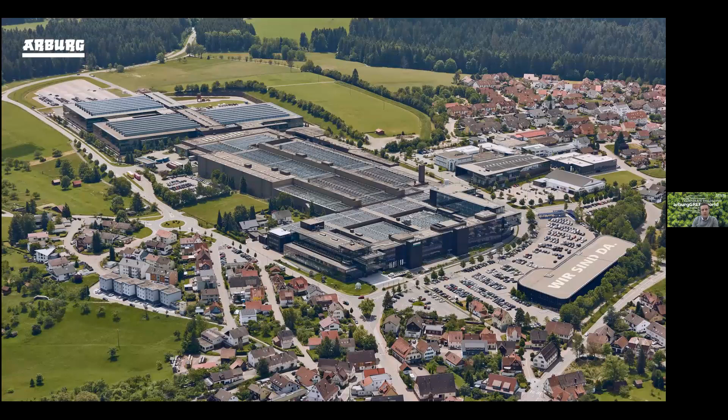First of all, a quick and brief introduction and overview of the company Arburg. Arburg is located in the south of Germany in the beautiful Black Forest area, as you can see on the picture. This is our headquarters and main facility. All our machines are produced 100% in these facilities. So yeah, 100% made in Germany and 100% made in the Black Forest.

We are a producer of injection molding machines, so-called the all-rounder, in a range from clamping forces from 125 kilonewtons up to 6,500 kilonewtons or 650 tons. We have different driving concepts, beginning with the all-drive, which is 100% electrically driven. Then we have a hybrid concept, which means that we inject due to an accumulator to achieve a high injection speed. And then we have, of course, the full hydraulic injection molding machines.

Just to give you a brief overview of what we are doing. Some facts and figures: as you have seen on the previous slide, our headquarters in Germany is approximately 210,000 square meters big. We have further construction, so we are growing year by year. The turnover in 2020, due to the Corona effect, of course, was a bit less than the years before.

But we are on good track to achieve the same result as in previous years. So quite happy with the order income in the last year. Export share about 70%, and worldwide we have approximately 3,400 employees.

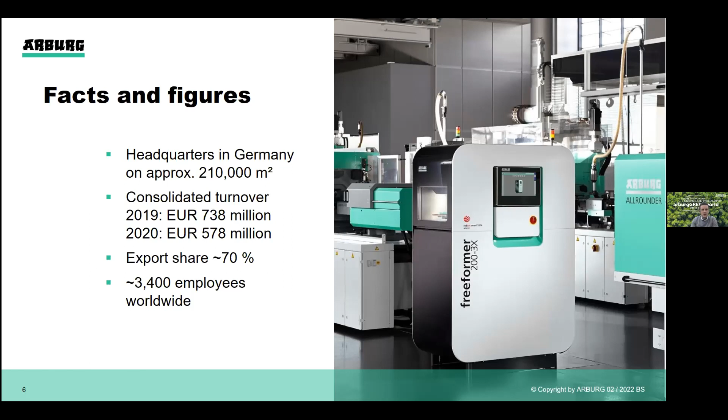Coming to my main topic, sustainability: keywords such as alternative material processing and use of recycling material, the responsible use of raw material, and as well energy efficiency and legislation, are increasingly becoming the focus of processes in industrial companies. Based on this, it is also part of our philosophy and our daily business.

So talking about added value, resources, regulation, and circular economy. To have answers to all these requirements and questions, our solution for these big challenges—and not just big challenges, it's also a great opportunity—is the so-called Arburg Green World.

With the Arburg Green World, we're bringing together all of our activities for greater production and resource efficiency, as well as a more circular economy and a sustainable reduction in the carbon footprint of plastic processing. One major topic, of course, is the circular economy. Circular economy means targeted use and efficient recycling of plastic.

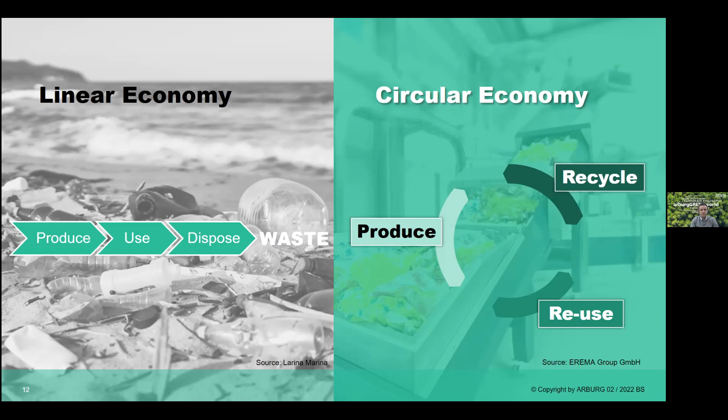And a functioning circular economy, again, is only possible when everybody is working quite close together. But therefore, from our point of view, the focus of circular economy is on the recycling and the processing of recycling material. And what does recycling mean?

Does it mean recycling, or how are these materials available and how does this material behave? And therefore, I would like to start with the definition. You see on the left-hand side, the PIR, the post-industrial recyclate, and these are collected directly in production as a startup material or as an off-spec product. This material stream can either be fed back into the process in part, or it is processed again as granulates by service providers.

And then on the right-hand side, or otherwise, we speak of the PCR, the post-consumer recyclate, and all plastics that occur at the end user. In Germany, mostly collected in the yellow bag, it's called the yellow bag, but mostly thermally recycled and not returned to the material cycle in production process.

And this is where we need to have our focus, on the PCR material. And for a circular economy, these two resource streams must be post-treated. And what does it mean exactly? Let me further introduce you to some more definitions.

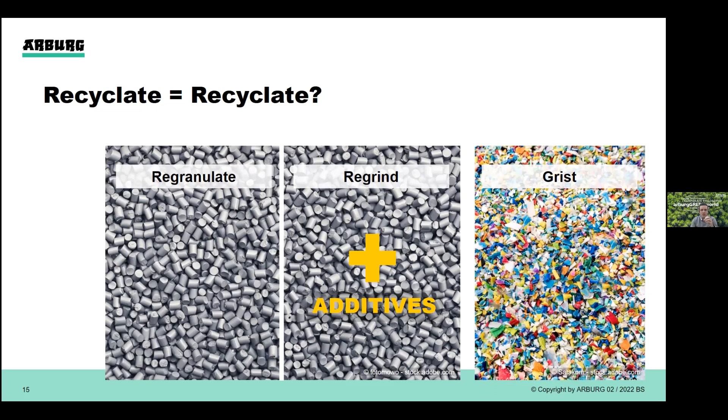And on the right side, we have the grist, with different sizes and shapes. It can also be contaminated with some dust, but this grist is not compounded and not regrinded.

And then in addition, there's also a different definition of terms of the recycling grade in terms of the type. On the left-hand side, we have type pure, which means only one polypropylene, for example, from a raw material manufacturer. And then we have the variety pure, this means only polypropylene, possibly from different raw material manufacturers. Then we have the variety-like, this means polypropylene only, but different.

It means only polypropylene, but from different sources or with different properties, for example additives, talc, and whatever. And then we have on the right-hand side the most difficult to process, the mixed different plastic. In this case, it means that PP and PE are mixed together and have been recycled, which is definitely the greatest challenge to process furthermore.

This is just a beginning and an overview of what recycling is about, and why it is so difficult to process recycling due to the different types, due to the different shapes, and so on. So recycling means, at the end of the day, it is not just the recycling itself. We have, as mentioned, different shapes, we have different sizes, but also the composition can vary, and this turns into effects on the processing.

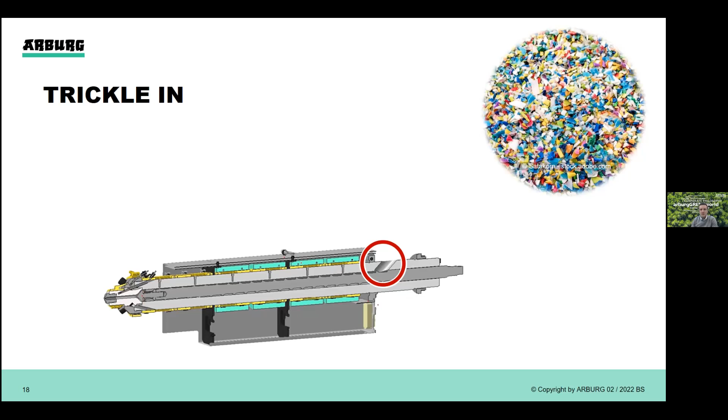But this is not the most flexible solution for preparing regrind, so we have improved the filling geometry, as you can see in the green picture. An additional vertical hole in the intake area, at a 90-degree angle, is intended to improve the trickle-in behavior and the subsequent sliding of the regrind, ensuring that especially the grist material is fed properly into the injection unit.

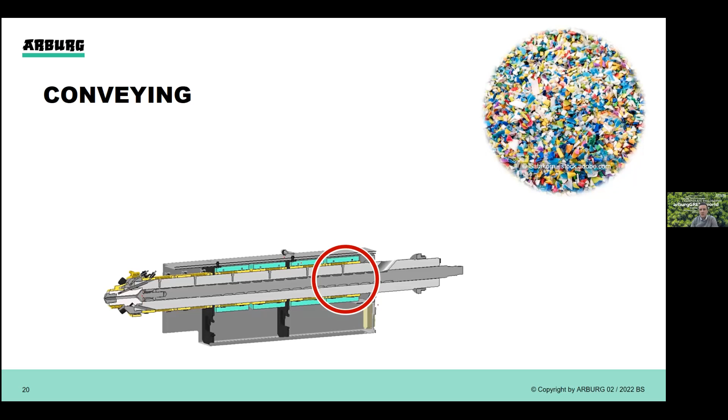But conveying is also important and needs focus. One step further towards solids handling: the regrind differs in grain shape and size, so the transport of these solids can be reduced. The conveying of solids can be improved by increasing friction between the cylinder and the solid itself, achieved by making grooves into the barrel, shown as the dark green line. This prevents the material from circulating with the screw rotation and helps ensure the material doesn't slip through.

Not only modification to the cylinder geometry can improve feeding behavior, but the screw geometry itself also plays an important role. A screw with increased compression is suitable for processing regrind or recycling material, so we recommend a so-called high compression screw. Based on our experience, this ensures improved melting but also improved feeding behavior, thanks to its deeper cut feed zone in the screw itself. This really comes down to the different shapes and design of the screw.

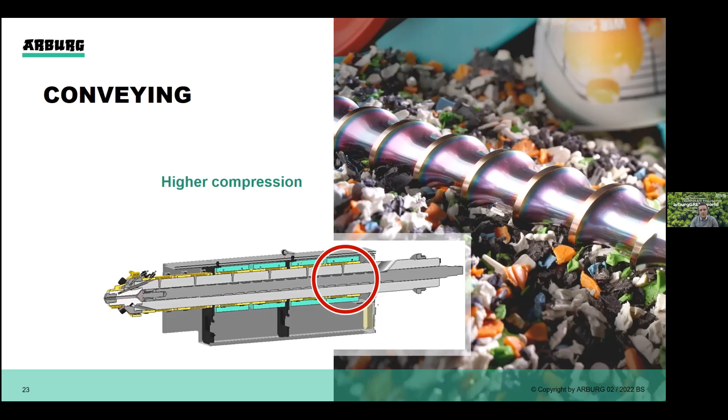Another aspect concerning processing of regrind that has not been dedusted: dust content, especially when processing grists, can lead to deposits on the screw. In addition, the recycling material can contain impurities that are harmful to the screw and barrel. Our answer to these deposits is the correct use of coating technology, and we recommend a chromium nitride coating, CrN coating, as shown in the picture, to reduce deposit formation and also provide increased wear protection.

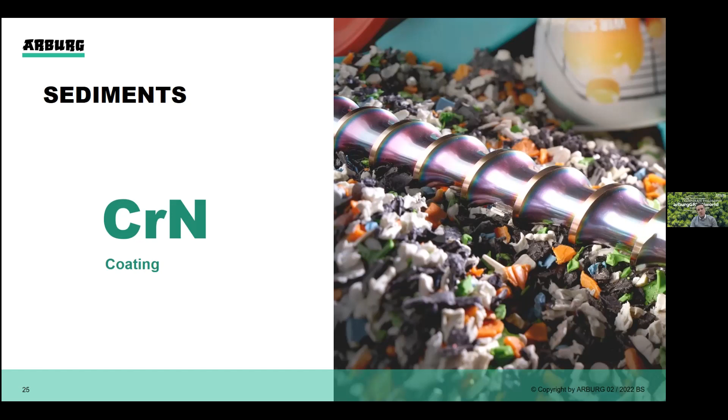So this was a brief overview of our hardware features. As mentioned in the introduction, we also focus on software solutions. Now to the control and software, which also have an impact and support the processing of alternative material. This support includes, at the beginning, the ramping up of the process, a so-called control soft start, through to stable production. What exactly does this mean?

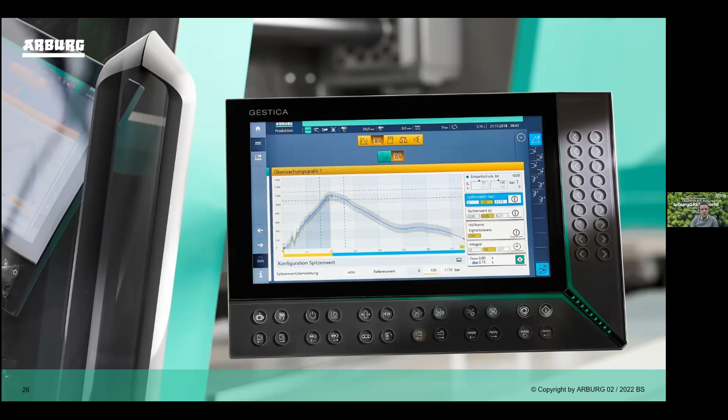Let's have a closer look. Imagine the injection molding machine starting up after a long standstill. The tool is not yet thermally balanced, the filling behavior changes, and the viscosity changes. So the application engineer must fine-tune and change parameters such as switching point or holding pressure level so the cavity is not overfilled right at the beginning. The multi-stage startup gives the application engineer the opportunity to successively adjust parameters shot by shot, bringing the process into balance more quickly, as shown in the graphic on the slide.

Focusing on another software feature or assistant, it's called the Screw Pilot, which works like an automatic distance control in your car. The advantage of the Screw Pilot is that it reacts adaptively to dynamic effects. With regard to the machine control, it always knows, and this is crucial, where the screw should be when filling the mold. In the event of faults, the target position is corrected, so reproducible mold filling can then be guaranteed.

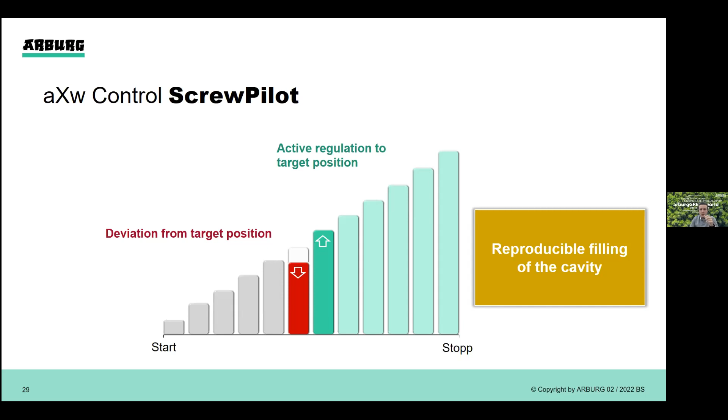An additional control function that supports the processing of alternative materials like recycling is the so-called pressure pilot or pressure control. In injection molding, this means: if you are in an injection mode with an increased pressure level and need to downshift to holding pressure, the control must first reduce the pressure quickly and then switch to a dynamic so-called switch over.

This is to prevent the melt front from undershooting or standing still, and it leads to an improvement in the balance of the tool as well.

Last but not least, the assistant I would like to introduce is the so-called reference pilot, or reference curve control. This means the machine knows the distance, for example the pressure profile in the tool, via a sensor, and can react accordingly during the cycle. This requires a sensor in the tool, but it is easy to implement or adapt in the mold, and in combination with the assistant can lead to improved part quality.

What I would like to stress is the combination of software and hardware, using sensor technology in the mold to make it more intelligent, and combining digitalization with circular economy and alternative materials. This is key to success, even in a topic which is quite difficult to handle these days.

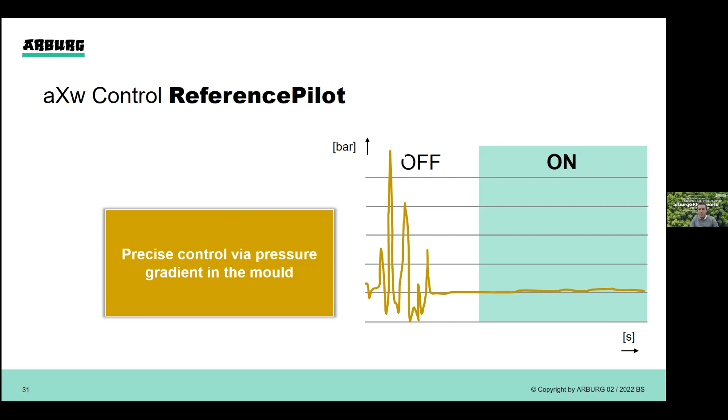As we have seen, not all recycling materials are the same, because they differ in shape, properties, and so on. Due to a modified plasticization, this seems helpful to improve the feeding and conveying behavior, as well as the plasticizing behavior itself.

Furthermore, the assistance systems I have shown before also support the forming of molded parts from the start of the process to a stable process at the end, achieving a good result at the end of the day.

Nevertheless, let me make it quite easy: if a process is additionally or completely loaded with material of unknown properties or performance, we can unfortunately not assume that the known product quality will remain at the same level. So frankly speaking, keep it in mind: it still means shit in, shit out.

Even when we're using a lot of sensors and software control features and hardware features, if the quality of the material is quite bad, we do not get any good results at the end of the day.

So recycling material still consists of macromolecules, and should basically be converted from the solid to the liquid melt state, and finally into the product itself. Let's keep it easy.

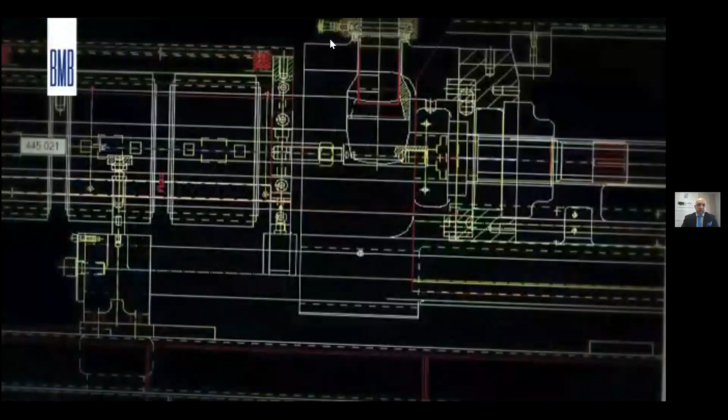We invest constantly in research, innovation and development to always ensure solutions with high performance levels and extraordinary quality. The competence of our technicians and designers represents the plus that guarantees to our customers a service that goes further than the realization of the product and that covers any exigency.

Our technical office, organized into mechanical, electrical and software divisions, makes use of the most modern technologies for the planning and the simulation of the various production processes to constantly guarantee the perfection of BMB machines from every aspect.

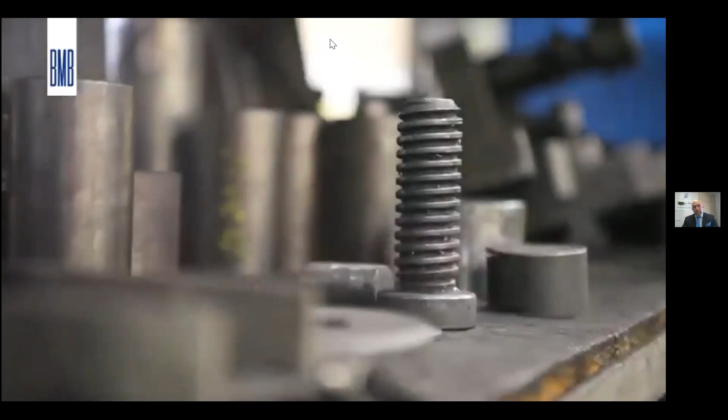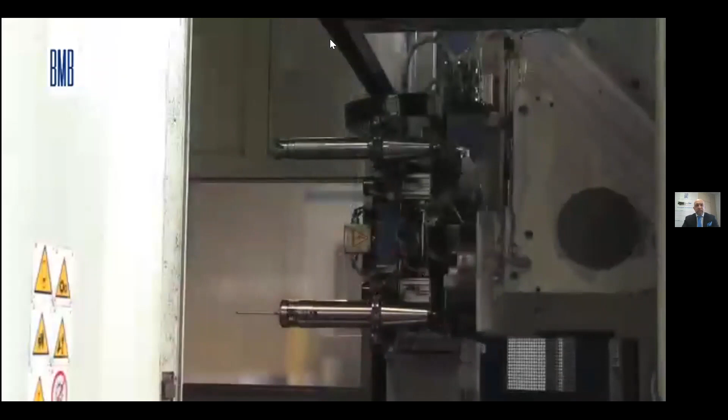We follow directly all phases of the on-site production process whilst maintaining maximum flexibility and global quality. All levels of BMB production are supported by computer technology and by utilization of the best available materials. This results in the most precise machines with huge productivity and reliability.

The assembly is a very precise and careful process, executed with the most sophisticated technologies by highly experienced technicians. The test is scrupulous, the controls and final checks are very attentive. All these meticulous actions render safe and perfect the BMB machines from every aspect.

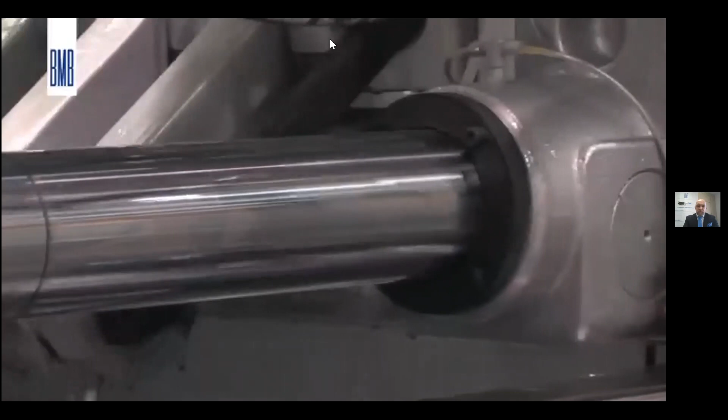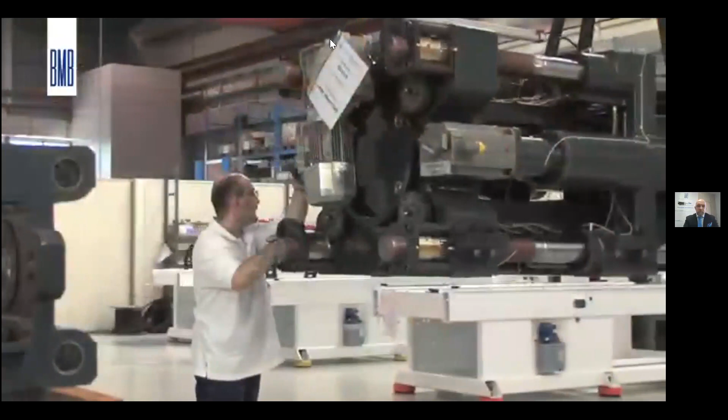BMB is organised into 4 lines covering 3 production plants. The first 2 plants are dedicated to the assembly and test of the KW series from 160 tonnes to 3,500 tonnes, the EKW full electric series from 70 tonnes to 550 tonnes, and the EKW hybrid series from 250 tonnes

to 2,500 tonnes. In the third brand new plant, we assemble and test the very large machines, KX series, over 3,500 tonnes clamp force.

With such a vast range, BMB are confident that all our customers' wishes can be met in full and even taken beyond the normal boundaries with our host of special applications and bespoke solutions.

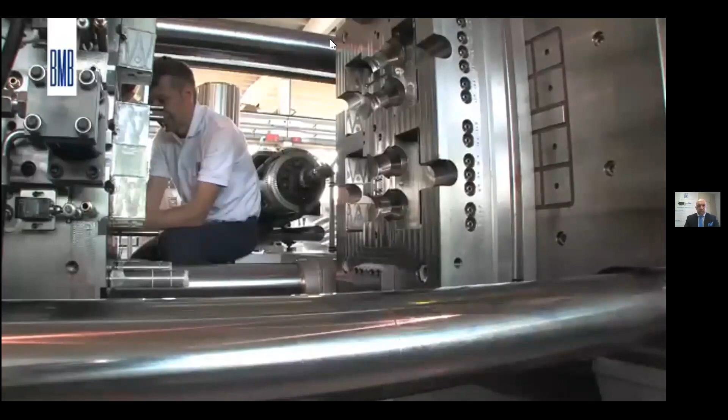BMB's dedicated team, working in unison, adopt a shared ownership approach that ensures continuous control of their product, constant supervision of accuracy, quality and consistency that create the solid engineering foundations that underpin the longevity of the final product.

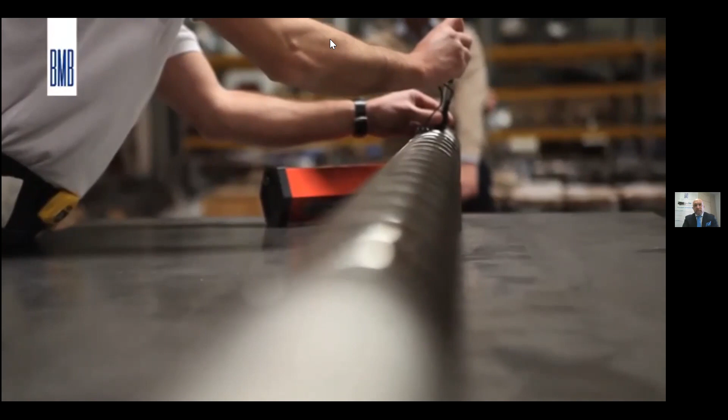BMB machines incorporate the very latest technology that is continually developed and refined to ensure optimum performance. All the stages from initial concept through design, manufacturing to finished assembly culminate in the final product now ready for

extensive and in-depth testing. Where complete systems are supplied, i.e. machine, mould, robotics and ancillaries, production conditions are replicated to ensure that when it arrives at the customer's plant, it is ready to produce.

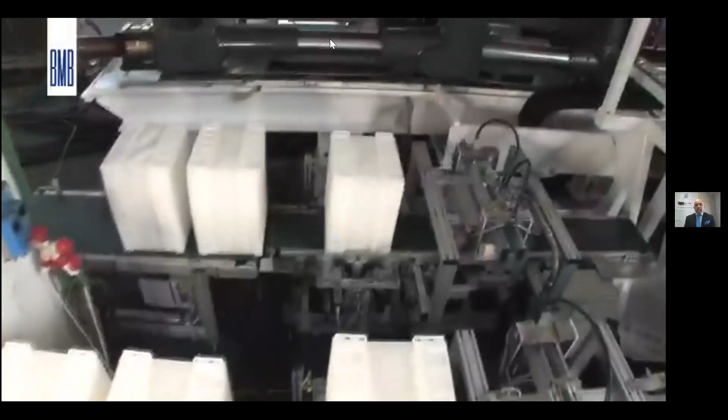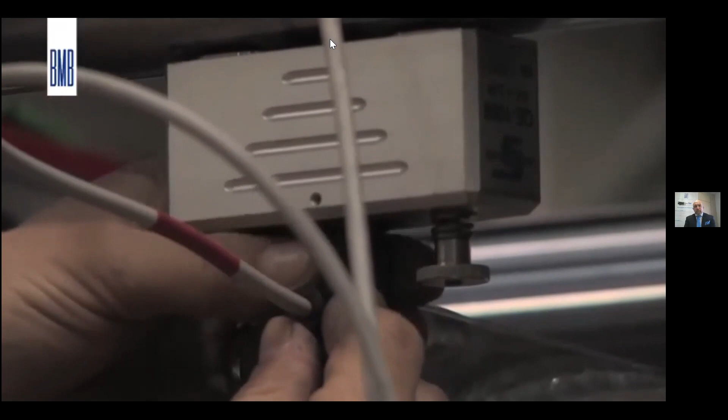Each function is subjected to the most rigorous test procedures. Final adjustments are carried out.

Such attention to detail guarantees perfect operation, performance and efficiency, and most important, long life, even with the most sophisticated multi-cavity moulds.

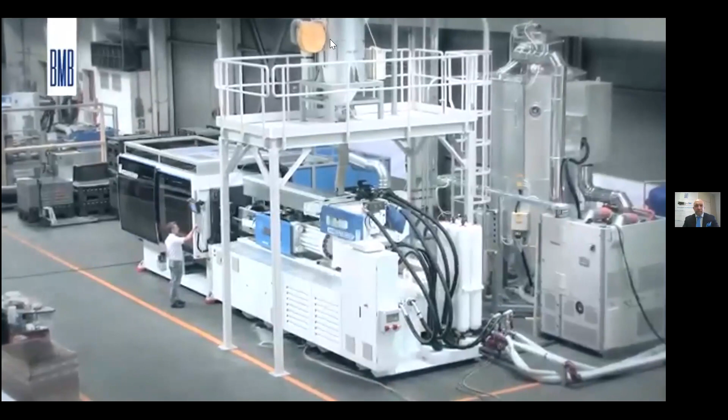BMB know at the point of dispatch that they are then supplying their customer with a finished product that will maximise their return on investment.

Customers should never feel isolated. We are not only producers, but active partners for the entire life cycle of the machines. Thanks to a global service organisation, BMB is able to follow its customers and its machines very closely, so you're never far from home.

Our premises are located in the major manufacturing city of Brescia, which is situated in the industrial heartland of Italy, and it is organised in 3 production units, side by side with modern and functional offices. Sales and after-sales offices placed in important commercial locations create an efficient infrastructure dedicated to the end users. BMB is present all over the world.

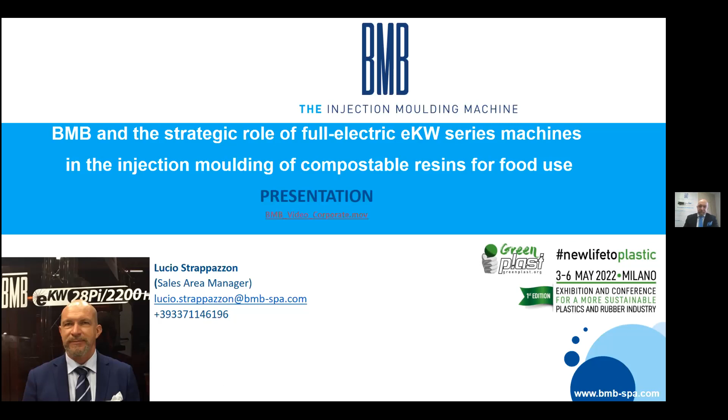A small introduction before we go to the heart of our presentation: 80% of marine litter comes from the mainland. We are responsible, no chance about it. 96% of European citizens know the problem and consider it connected to our education. I agree.

The European community produces laws and laws to combat environmental pollution, but apparently all depend on plastics—but it's not like this. How can the company do more to save the world? We try to explain our idea of it.

Companies like BMB, Engel, Arburg, Piovan have a really key responsibility, because everything starts from us. And afterwards, we are also normal citizens who have a big responsibility to manage the recycle of plastics. But in the beginning, we have to be really responsible for what we produce, what we propose, like sales guys like me. We have to propose sustainability solutions. Also, the machine must be sustainable. We have to look for energy saving, and for the product that we put on the market, the plastic product.

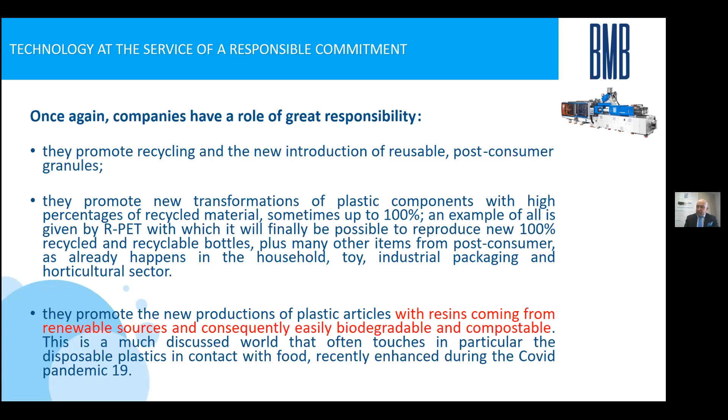Before we discuss, I will introduce greenwashing. Greenwashing is a really bad behavior that sometimes a lot of companies, a lot of people, sometimes engage in. What is greenwashing? It's the faked ecology, a mere strategy with an aim of interest adopted by some companies with the sole object of appearing sustainable and environmentalist, while in reality they have a very different purpose. You have to pay attention to this, because sometimes it's necessary to observe, to check very well a product or the communication of the company connected to this product.

The real emission of CO2 is the real measurement tool for calculating the eco-sustainability of a product, and whether it is recycled.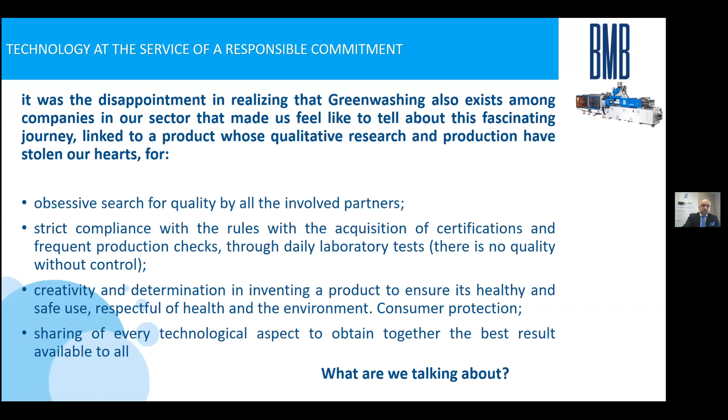Our disappointment is in realizing that greenwashing also exists in a lot of companies, also in our supply chain. For this reason, we decided to show at Green Plast the application that I will describe. We will finally produce a real home compostable coffee capsule.

The product is developed with the aim of self-decomposition in a maximum of 6 months in a normal home composter for organic waste, or for traditional organic waste collection. Practically, you can put your coffee capsules in the normal container where you put fruit, coffee, organic waste. The product does not generate post-composting microplastics. This is very important, but it can also be used as an excellent fertilizer for cultivation in the home garden. Here you have an image of what, after 6 months, 25.9 weeks, you will find inside your composter. I think the image speaks for itself.

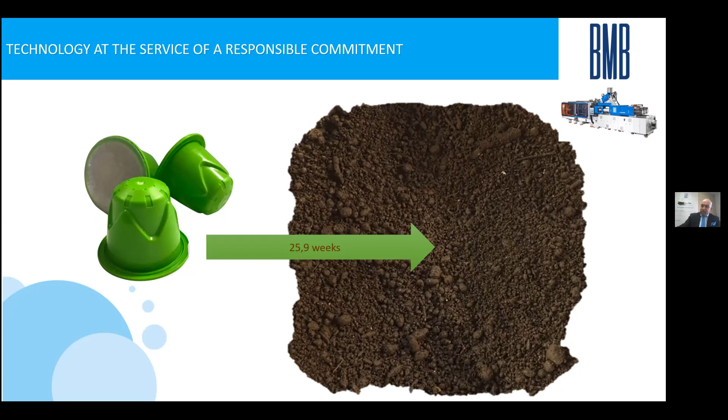A benefit of these capsules is a high shelf life of 12-18 months. The quality of the coffee inside is like the first day for 1 year minimum, and even 1.5 years is very good. We reduce waste because with the good shelf life, of course, you use the product every time. And the capsules don't require any other packaging, because inside there is a barrier that is sufficient to protect the product from humidity and oxygen.

Circular economy, of course, because there is simply a use of the waste. It is thrown in the organic waste bin for home composting or waste collection. It does not require any separation of the wet fraction from the plastic fraction. It reduces the production of chemical fertilizers because it's already natural fertilizer. It reduces energy consumption and CO2 emission due to the elimination of transport and energy needed for recycling. This is true.

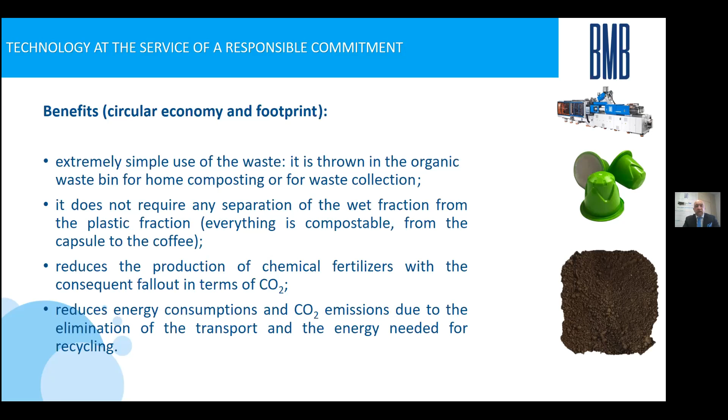This is another benefit of the capsule that we will show at Plast. Here you have a simple graphic image of the circular way of our capsule. We can start our tour where you can see the tree of coffee. The tree of coffee will produce, in the second position, the coffee after much work from many people. From 2 to 3, we will find our machine.

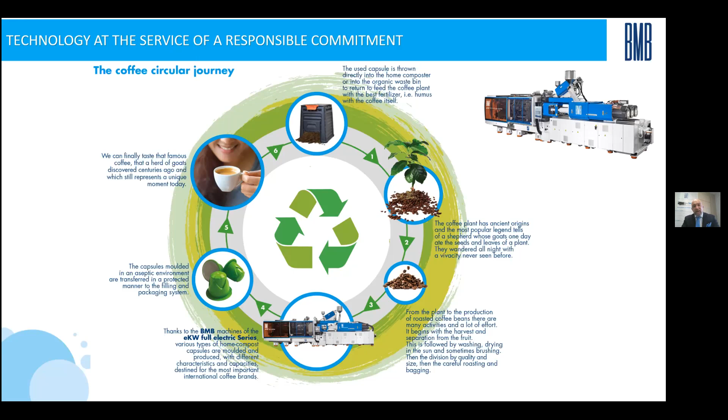Our machine will prepare the capsules, a full electrical machine with 2 injection units, and I will explain why. Why full electric? Why 2 injection units? The product that you can see from 3 to 4 is the capsule that gives us the possibility to drink a good coffee. In the end, the capsules will go into the home composter, which produces natural fertilizer for the same tree of coffee.

Why BMB full electric energy saving series? Many reasons: torque motor with direct coupling to the plasticizing screw, brushless motor directly coupled to the satellite recirculating roller screws for fast, silent, precise clamping and ejector.

Liquid cooled oil bath actuators guarantee great reliability and respect for the environment. Exclusive use of food-grade lubrication oils, no grease. Recovery of braking energy and re-emission of the energy for the machine or directly on the network. Energy saving and considerable economic saving.

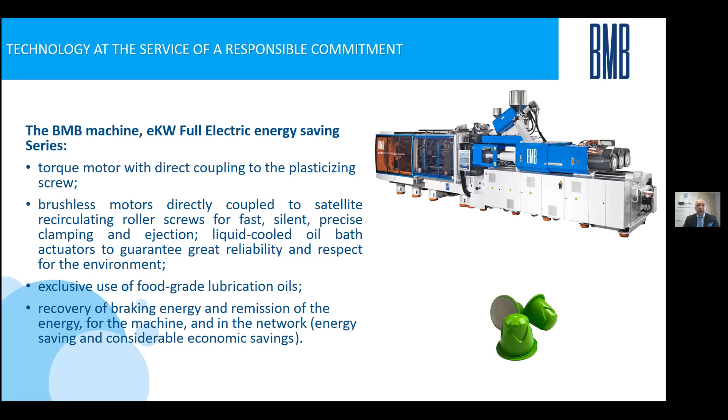This is very important: BMB energy saving has an injection with brushless motor in line with the plasticizing torque motor, for the reduction of moving parts and dimensions. No reducer, no timing belt on the direct drivers, for the reduction of parts and potential breakage.

Injection pressure for these capsules is very high, around 2000 bar, and the speed around 400 millimeters per second. Our range of full electrical machines goes from 100 ton to 1000 ton.

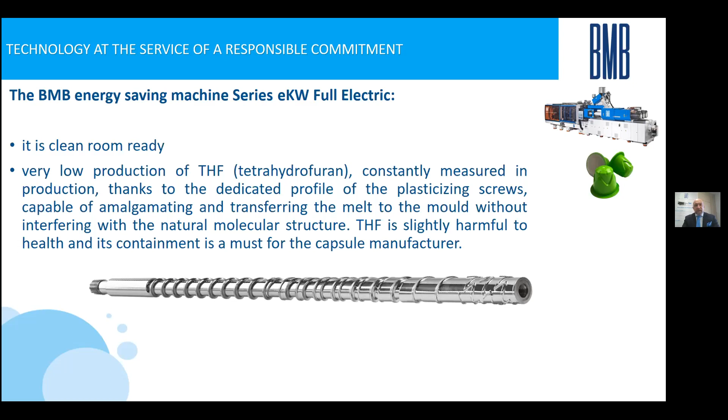The screw is very important in this type of transformation because this injection process tries to produce THF, tetrahydrofuran. This is a not-so-good gas that will be produced during the plasticizing moment if the treatment of the material is not so good. The screw has an important responsibility in this, and we control the process.

The controller is very important in this case because there is a co-injection between two materials. In only one page, you can see all the data necessary to manage and control all information concerning the two injection units.

Here you can see what we control on one page, because the really important matter to produce this type of article is that we have to control the hot runner - a very high quality hot runner of the mold, with three sections.

We open the hot runner totally and start with the first material, the external material. Then we close the hot runner 50% and start with high-speed injection with the second material. This is the layer inside, in PVOH, which we will explain. After, we restart with the same material as before.

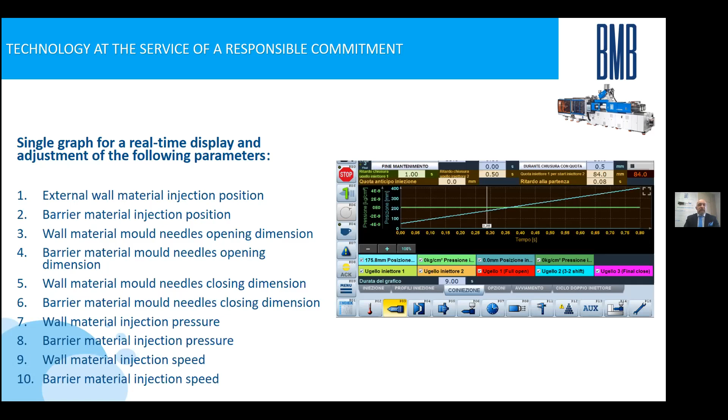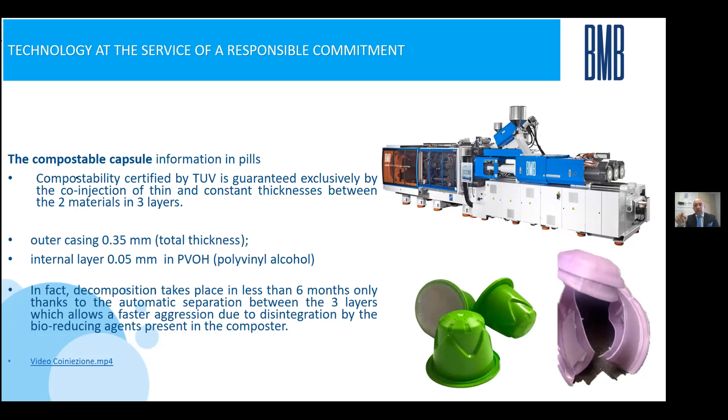Its thickness is 0.05, and the total thickness of the cap is only 0.35 millimeters. You can imagine, 3.1 grams is the total weight of the cap.

PVOH is a new material for the barrier to oxygen, and came after EVOH, and is 100 times better. Of course, the machine is able to connect all by OPC-UA.

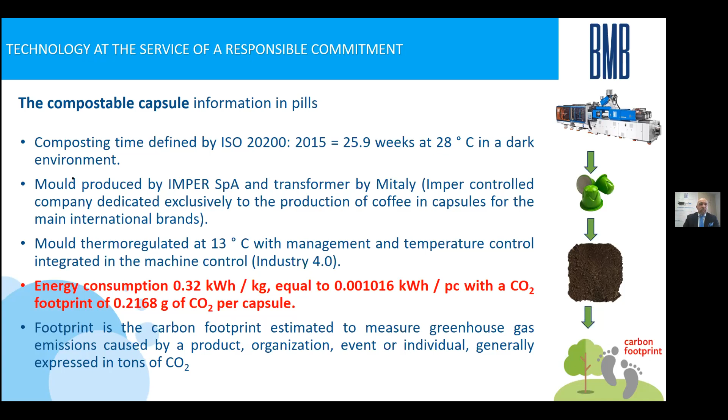Consider that normally the emission of CO2 is measured in tons. Yesterday I tried to calculate how many tons of CO2 we produce with this 16-cavity mold for this product, and it's nothing.

We thank you, Mitaly, for giving us the opportunity to transmit this exciting adventure. We hope to have managed to convey the same enthusiasm that we captured in this truly compelling and sustainable technology and transformation process.

This piece of information related to the compostable capsule and to coffee itself makes us understand how much value can be hidden behind a small plastic object - how much care for the environment, how much work and strict regulation are behind its production, transport, storage, and encapsulation, to guarantee us an unmissable and pleasant daily moment with respect for health and the environment, which is our focus here.

We thank you. I will close with the production of this article, and we wait for GreenPlast in May to see exactly this.

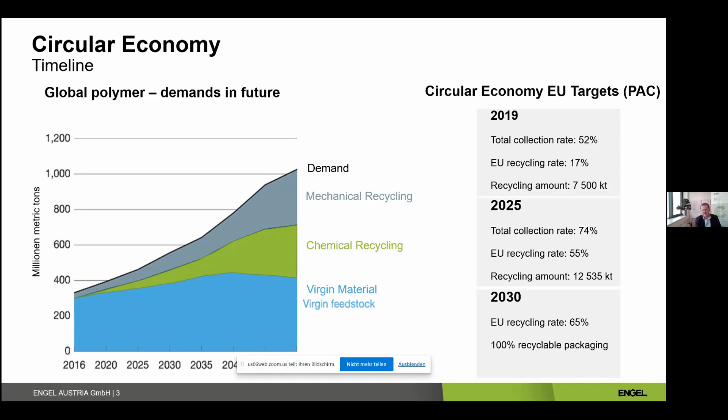So these are the figures, and this is the market situation what we are facing now, and this is a real big game changer.

I think this is because the recycling material has different, or less, technical properties. Another thing is that the recycling material is almost from light gray to dark gray, so it's really hard to use recycling material in consumer applications, but there are certain ways to do it.

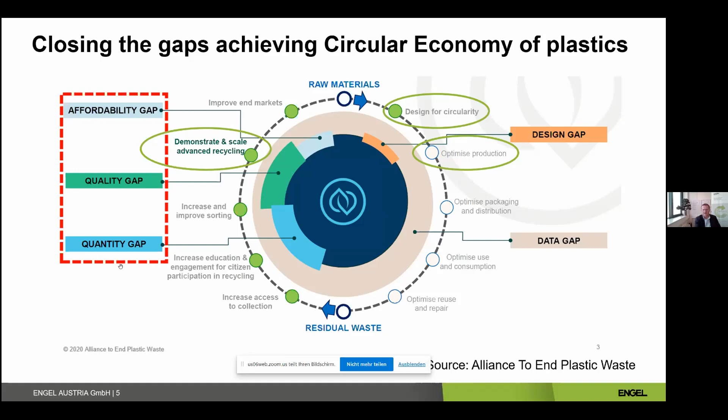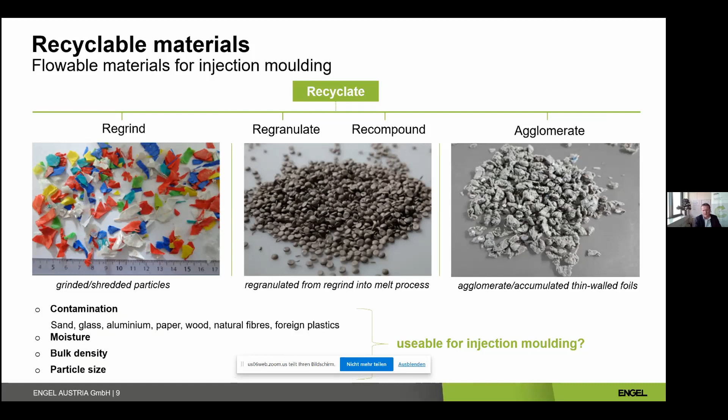So in order to find the proper solution for the customer, we also have a questionnaire that we hand over. If you have a problem and you'd like to ask us - if you have a certain material, what you can do with it, or if you have a certain product, ask us which kind of material can be used - we are able to assist you in these decisions.

Looking at the technologies for using recycling materials, which technologies are related to the mold side, what we can do. First one is in-mold labeling. This contributes to recycling technology because it fulfills the regulations of design for recycling, so this is obvious and clear.

Then we have a technology like foil melt, for example. You put the film between the cavities and refill it from one side. Therefore, technologies are also possible where the film is on the same base as the material behind. This is very suitable for decorating parts, because the film is almost more thick and has a certain optic, and therefore it's used for decorated parts.

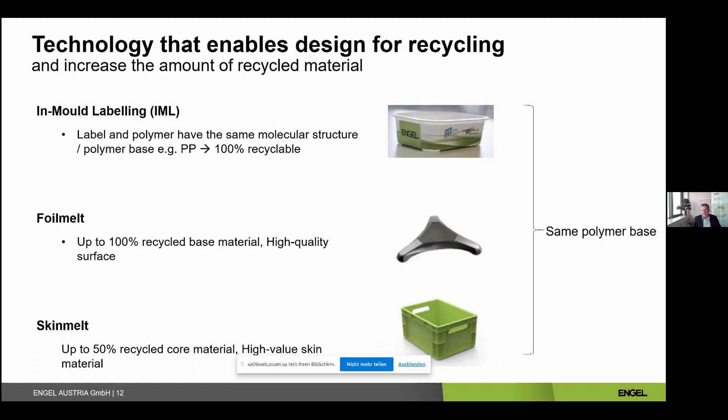You have two of them, one for the skin melt and one for the core component, which means loading the main injection unit with the skin component from the front side, and with the core component from the rear side, and then inject it together into the mold, and then the skin is laying on the wall of the mold, and the core component is pressed into the center of this.

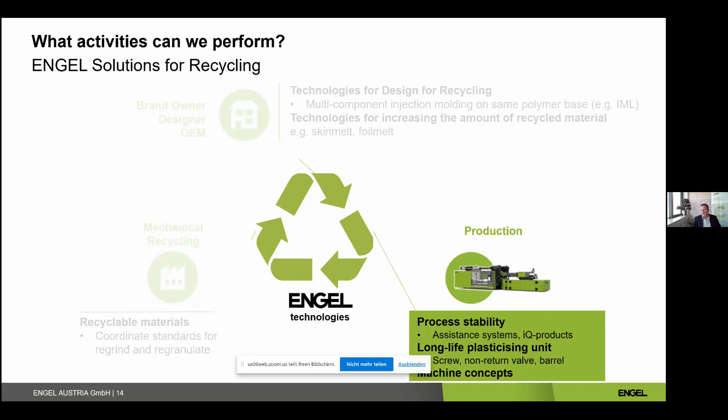Recycling material varies in different ways, starting with the bulk density, color, and melt flow index. And for all these variations, systems are needed in order to handle this different behavior of the material.

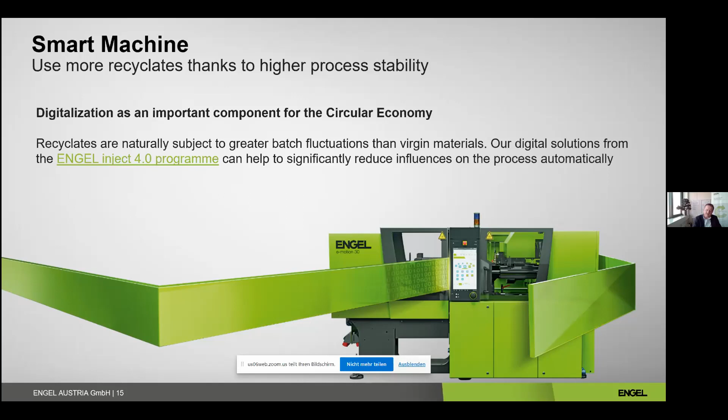Starting with the Inject 4.0 program, which has different modules which also contribute to the circular economy, it is one idea to analyze everything and measure everything in order to control the process. This is the first thing, and the second thing is to make the process more transparent and see what is going on in the machine.

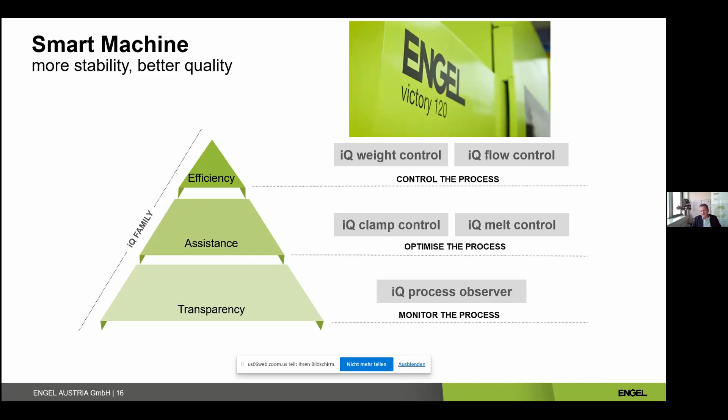And we have here three different levels. On the bottom is the transparency, the assistance, and the efficiency of the machine. And now we are walking through all these different kinds of IQ products contributing to the recycling technologies. We see three of them are more relevant: the IQ weight control, the IQ clamp control, and the process observer.

Starting with the IQ weight control - what is the IQ weight control doing? The situation is, for example, and we showed this already two years ago at the last K show, we had a machine there with two hoppers, with two different suppliers of a material. It was a technical polymer, and with these two different suppliers who had two different melt flow indexes.

And then we switched over from one to the other hopper, and the machine adjusted the parameters by themselves in order to have always the same shot weight. So the shot weight is influenced by the viscosity most, and this is a problem for recycling material. The shot weight is also influenced by the closing behavior of the non-return valve, by different temperatures and ambient conditions.

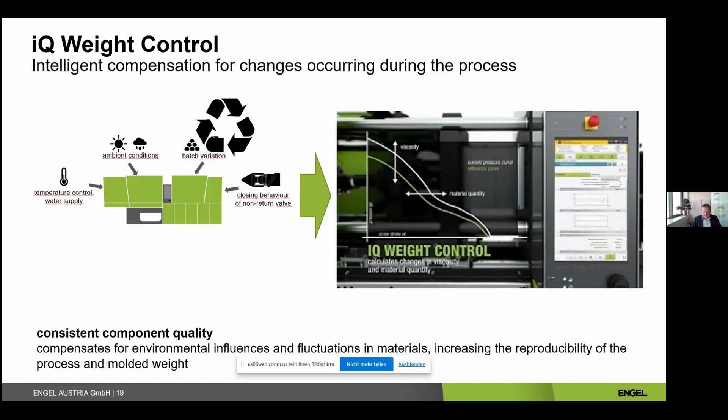And all these conditions get controlled, let's say so, by the IQ weight control system. And this figure shows how it works.

Changing from one raw material supplier to the other one - this is a very important feature for our customers in order to have the flexibility of different raw material suppliers for recycling material.

Looking to the clamp control - it controls the force on the clamp side. So this has different advantages. Yes, first of all, it regulates the needed energy, so this is also an energy saving system, let's say so.

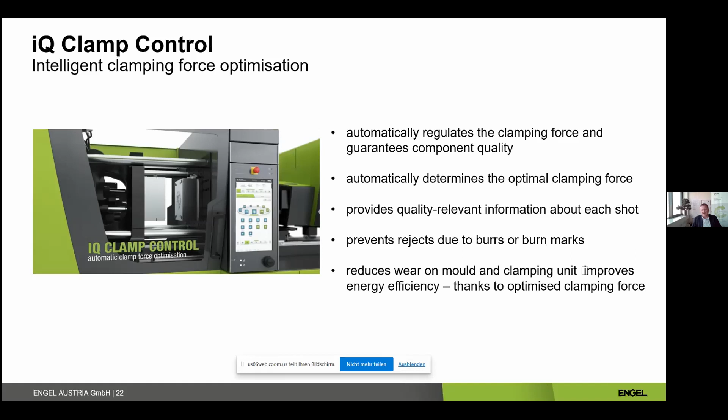The IQ process observer is a system that helps, because if you're running a machine, it's really hard to control every parameter in order to be in the right range and get the proper product out. This becomes more complicated with recycling material, because the constant input material is no longer given, so there's a need to analyze the data. This gives you the assurance that your product is always fine, because you have data showing a proper process, and due to the proper process, a proper product is given as well. So this is the idea of this kind of observer.

You can adjust your own parameters on the system and watch them, and if you realize some of these parameters are completely out of your expectations, you can interact as the first response, and secondly, you know what went wrong, and can adjust the process, changing the material and whatever, in order to have a proper and constant quality of your products. This is a very nice feature, this IQ process observer, because it can be adjusted by the customer and used as a really smart and simple tool to observe your process.

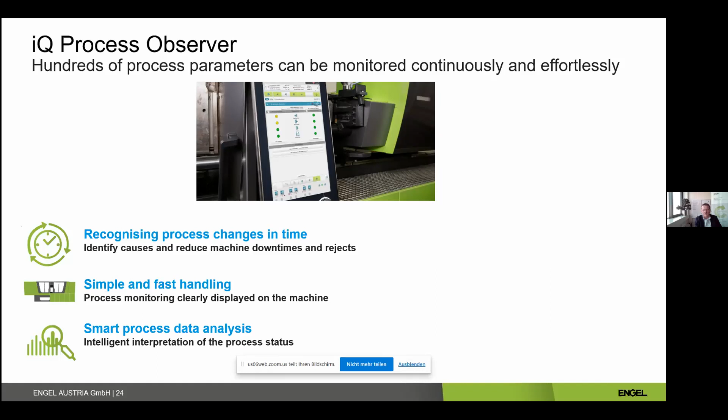These are the iQ weight control modules, which also assist in the usage of recycling material. Now we're going to the more tricky input material.

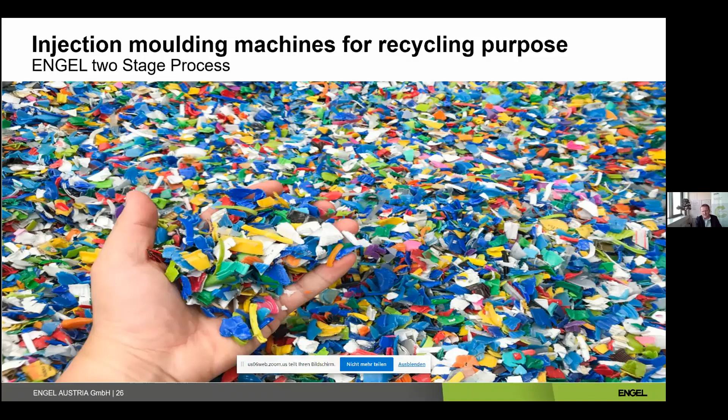Looking at different kinds of flake sizes, as shown in this picture—they look like cups from my point of view, different sizes, long parts here—so the feeding behavior may be difficult for this kind of material, for example, but it looks very clean and nice. And yes, the color will be one problem as well.

If we run such materials, like agglomerate or other recycling material, some additional systems should be installed on an injection molding machine. This can be either a dosing system for feeding, or starving feeding the system, because this gives a certain opportunity for backwards venting and also to always have the proper portion in the screw. The IQ weight control system is obvious, and two further systems should be implemented on the injection molding machine: degassing and filtering.

So how does it look like? It's a technology quite well known in the market, which is a plasticizing unit using an injection piston, but this can also be changed to a feeding screw or injection screw. We have two systems available, depending on what is needed for the product. Due to this concept, we have the possibility to add a filter or a venting section, or add some additives at different points.

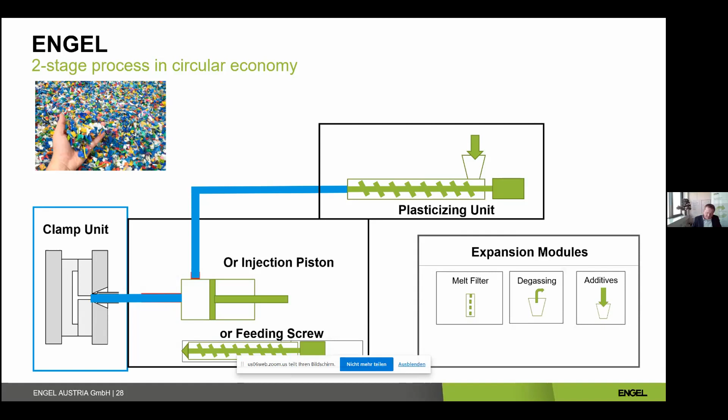We have a partial filling of the screw, so we reduce the filling of the screw, and due to the reduced filling we have a certain free area, and then we just let the gases out to an opening in the barrel. So just via the opening we got proper venting, only relieving the moisture.

The next step was adding a vacuum pump, which is commonly used in recycling technology—adding a venting port on the injection screw to remove the moisture content with a vacuum pump. This also gave a very good result. So we have available technologies able to reduce 1% moisture from the material. I hope this is never used, because 1% moisture is quite a lot—normally we're discussing much lower levels. If it's coming from a washing line it has to be much lower, but it was a principle test of what is possible.

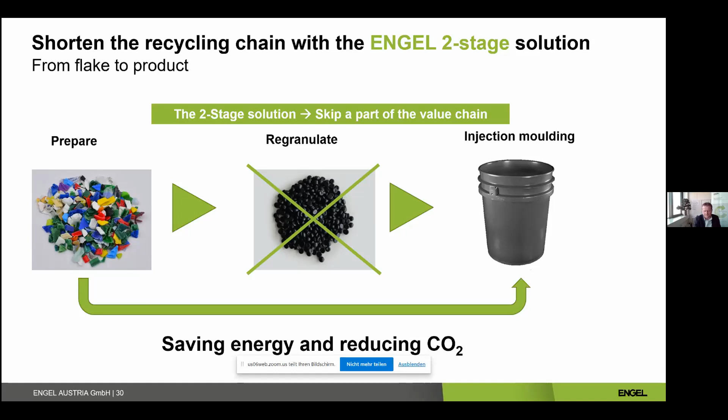So let me summarize. We have here the analyzing what Engel has done, and these activities are for our customers, to help you in analyzing the recycling material, to get ideas what can be done with this kind of material and process it stable in your system with proper machine solution and IQ system. And if this does not fulfill your demands and you need to process cheaper material or have higher demands on your quality, then we are offering different technologies for drying the recycling material, or venting and filtrating the recycling material for an excellent product. Thank you for listening.

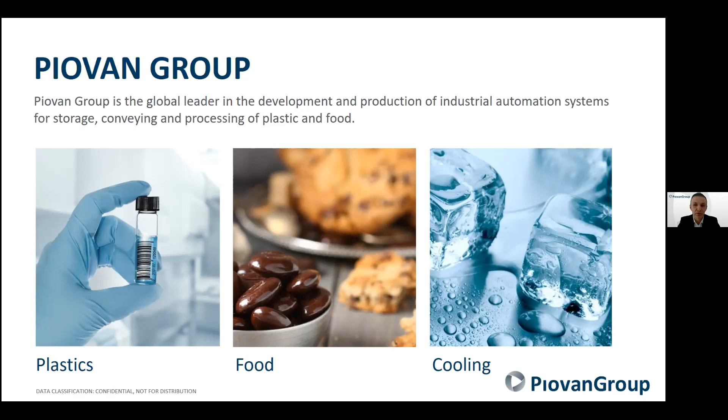Piovan Group is a world leader in development and production of auxiliary equipment and automation for plastic processing, but not only - also food industry and industrial refrigeration. Recycling of plastic is one of many industries where Piovan operates. However, recycling accumulates and takes benefit of the experience of all other sectors, including handling and storage of food products, and also the industrial know-how required for all recycling applications.

A few words about our global presence, which is one of the main characteristics of Piovan Group, besides our dimension and experience. Let me remind that we have over 60 years in the plastic field, and as for our dimension, we are approaching 2,000 employees. Another characteristic is our global presence, which is particularly important for the industries we deal with. We are present on every continent with at least one production unit. In total, we have 14 manufacturing facilities and over 100 presences between direct branches and commercial representatives.

Let me mention those most involved in our recycling industry. In Germany, we have a company, FDM, which stands for feeding, dosing, mixing. In Italy, we have Penta at Ferrara, particularly specialized in storage and handling of the most complicated substances such as powder and flour. Also, a new acquisition of an American company, IPEG Conair, includes Pelletron, who is famous for one of the best dedusting solutions on the market, also widely known and requested for recycling applications.

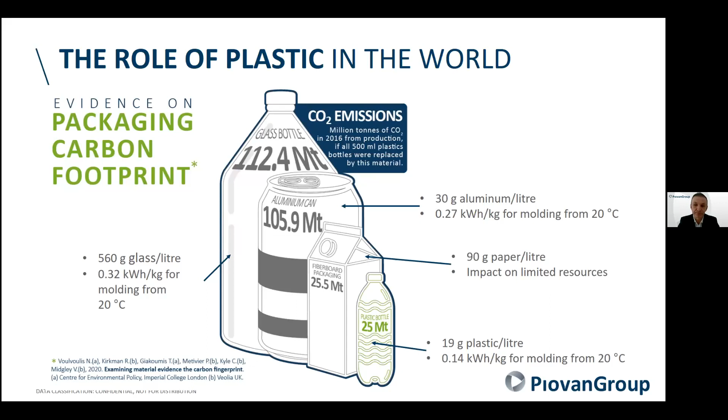It's a few tenths of the weight compared to these other materials. In addition to that, to melt the plastic requires much less energy. Finally, contrary to common thinking, our plastic bottle produces much less CO2 than its alternatives, so the carbon footprint is much smaller. Using recycled plastic reduces CO2 emissions compared to virgin plastic, because most of the greenhouse gas release happens in the extraction phase, so we are cutting this phase.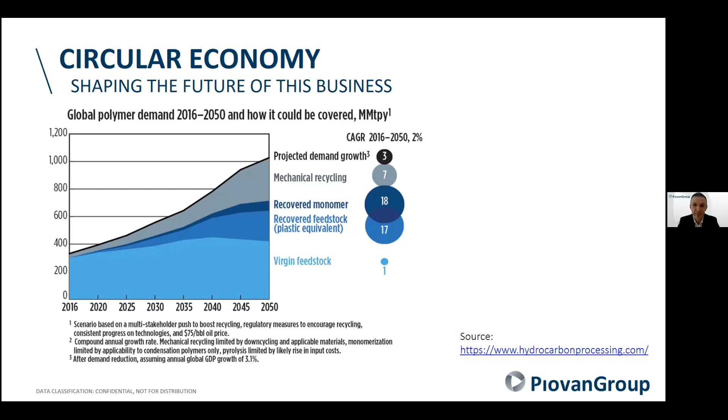Before we move to technical content, I want to underline that Piovan is particularly involved in the recycling of plastic and converting, the use of post-consumer plastics. On average, 1 of 2 bottles in circulation in the world in recent plants have been made using Piovan equipment, and with the growing popularity of bottle-to-bottle recycling, this part is destined to grow. Probably because we accumulated experience on both sides of the supply chain, we are together. Piovan supplies the most important producer of recycling lines from Austria, from Europe and worldwide, and we also provide auxiliaries for transformers, so-called converters, which process the plastic.

What are the particular focuses for Piovan in developing machinery that uses recycled plastic? First, dedicated solutions for post-consumer plastic, because it represents difficulties in production: the mixture is often not homogeneous, dusty, material can agglomerate, has trouble flowing, and so on. Systems must be implemented to control and reduce contaminants, which is another serious issue. Control automation is also needed for tracking and monitoring process parameters of the product. Since complications and challenges from the market grow, maintenance necessity and capacity also have to increase. Last but not least, new technology is needed to face all these challenges, and that's why recent patents in possession of Piovan Group are coming properly for the recycling field and circular economy.

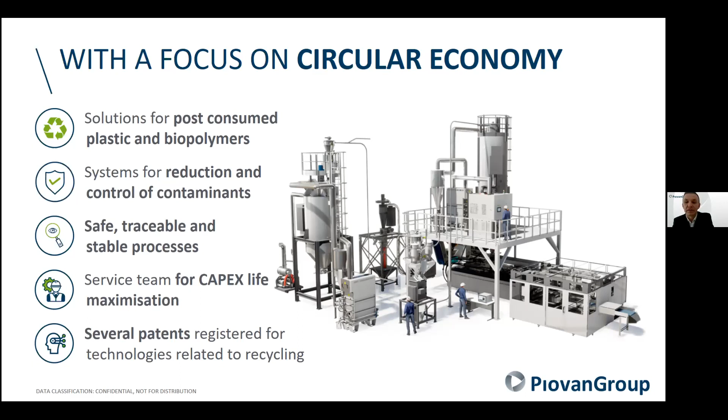Let's describe the challenges of using recycling material for us, as producers of automation and auxiliary equipment. First, degradation of capex, a reduction of machinery life cycle due to huge growth in dustiness, presence of contamination, and irregular behavior of materials such as flakes. Maintenance grows significantly, and the life cycle of machinery can even come down to 50% of normal.

The second issue is non-continuous quality of the lots. This point was widely introduced by my colleague from Arburg, about non-continuous batches of material, and due to this we have discontinuity in the characteristics of the product we inject. So scraps caused by quality of material or non-continuous process are difficult to guide, and scraps can grow by several percentage points.

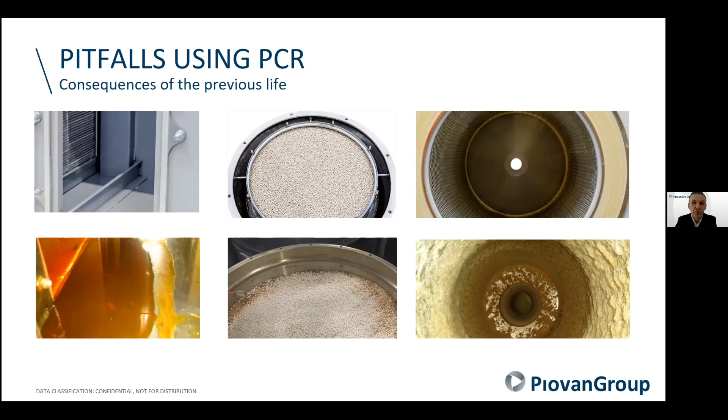The problems of post-consumer plastic are closely connected to its previous life. The plastic of the bottle or any kind of container interacts continuously with the content inside, with the drink, and vice versa. So-called NIAS, not intentionally added substances, migrate from the drink into the bottle and subsequently from the bottle into the drink in the next reincarnation of the plastic. This phenomenon is intensified for sweet drinks, and intensified much more for other types, for aggressive liquids, especially detergents and so on. Obviously, in the use of recycled plastic, there is great discontinuity of characteristics between various batches.

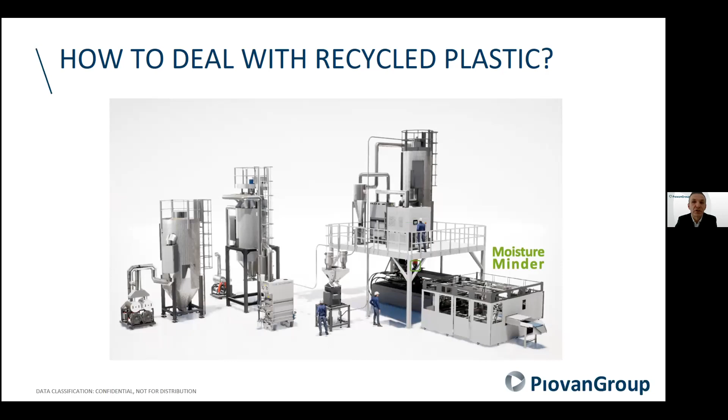In order to face these problems with recycling material, we have a number of technologies, a wide range of products developed properly around this issue. Now you can see on the slide different names of different devices, equipment, technology, or integrated systems created to address this compatibility with recycled plastic. Among them, between sophisticated algorithms for PET and rPET, you can also see more common devices like storage, dosing equipment, feeding, temperature controllers, cooling, but also, last but not least, supervising systems.

It's about Winfactory 4.0, which is Piovan's supervising system capable of tracing each product characteristic and each batch of material with parameters of equipment, history of alarms and so on. To this we can add laboratory instruments which monitor different characteristics of the products, and even come to monitoring and audit of operators and all operations with our machinery. These technologies and this kind of supervising we already supply to customers from pharmaceutical, automotive, and food industries, and of course it's available for recycling as well.

Since it's not the time and occasion to introduce the whole product range, I hope to see you during the Green Plast exhibition. So here we can see just a macro flow of processes for injection of post-consumer plastic. First of all, PCR, post-consumer granules, can be analyzed by our laboratory instrument, called Inspecta, which can analyze certain types of contaminants, certain types of VOC.

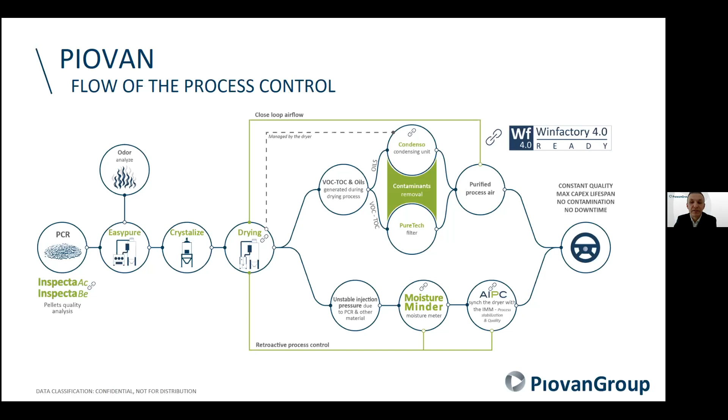So this is our technology available to work with post-consumer plastic. This machine, Inspecta, which you see on the slide, is no other than a portable laboratory, which was born as per the request of our customers, brand owners, bottlers, who particularly take care about health.

So with simple procedures, which can be available to a basic operator, we are able with this machine to detect the presence of VOC, for example acetaldehyde or benzene, to track it in a very short time, less than 60 minutes, and make accurate tests for all kinds of input. So we can do it for granules at an early stage during the recycling process.

We can do it with preforms, so when the plastic has been converted, we can put the preform inside to detect the presence of benzene, or we can cut a piece of bottle or a piece of extruded sheet. So this is about Inspecta, and let me remind you that this machine, this equipment, was a finalist of the 2021 Sustainability Award.